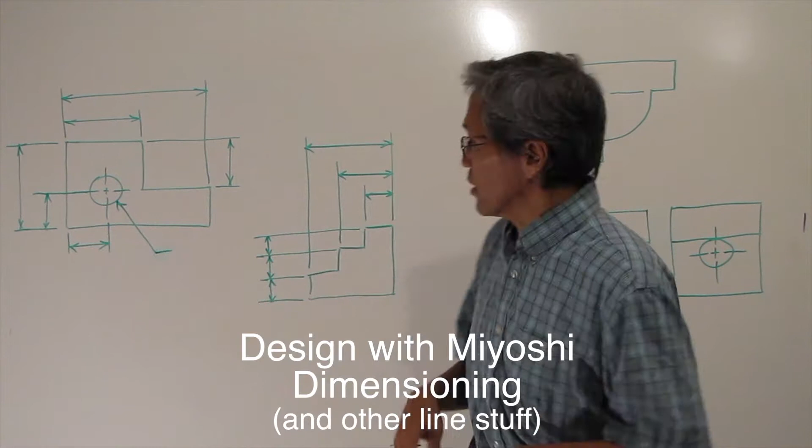I want to talk a little bit about dimensioning today and a little bit about lines in general. So, let's talk about dimensioning. There are a few rules in dimensioning, and I just named one of them. The biggest one is that you never, ever cross dimension lines. Unless you're an architect and you're doing interior dimensions. And there's a few other reasons, because of course we know that every rule has an exception. Except of course that one, but that's a different story.

So, if you recall, object lines describe the object. Center lines tell where centers of arcs and circles are. I don't have any hidden lines over here, but hidden lines tell where things are hidden, something that you can't see in the particular view. Then we have extension lines, which extend from the object to the dimension line, and of course we have dimension lines, which are the ones with the arrows on them.

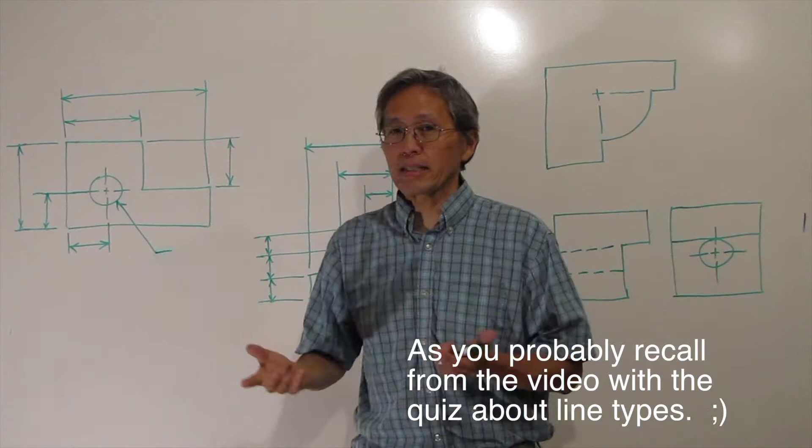So, like I said, the first thing you want to make sure you know is that you never ever cross dimension lines. So if I have this object right here, I would not want to have this dimension up here instead, because that would break that never rule. So we would not want to do that. And I'll just kind of erase that there.

So first thing, don't cross dimension lines. You can cross extension lines. Notice we cross extension lines there. You can cross object lines even. Notice we cross one there. And of course, you can cross center lines. We don't really cross any center lines there, but you can cross center lines and hidden lines as well. Okay? So, make sure you do that.

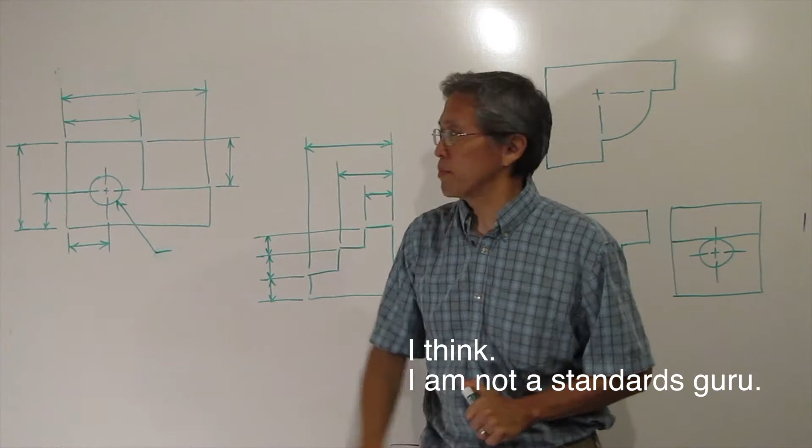The second thing you should know about dimensions is as you put them on a page, the ANSI, the American National Standards Institute, says that, at least they used to say this, the distance from the object line to your first dimension should be 3/8 of an inch. 3/8 of an inch minimum. It could be bigger than that, but it can't be smaller than that.

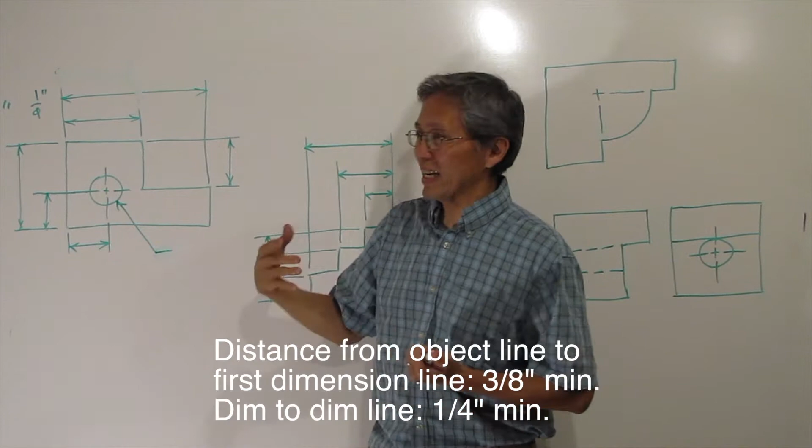Then each dimension beyond that should be 1/4 of an inch for every dimension you have beyond that. Okay? That's on the printed page. Obviously it would be different on the model, but that's what it is on the printed page. So 3/8 of an inch from the object line to the first dimension, and then 1/4 of an inch every dimension after that. So that's a nice way to look at things. It makes it nice and beautiful.

You will see some drawings that don't look like that exactly. They might be architectural drawings or some other kind of drawings that don't have those exact dimensions, but those are what I like to do for my mechanical drawings for my students.

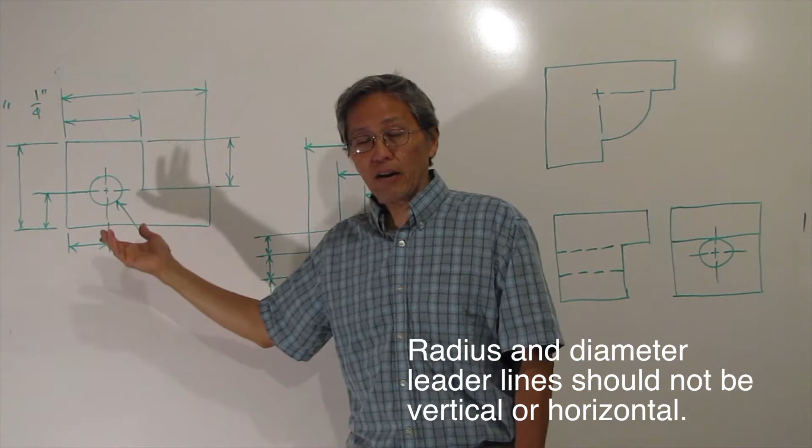Another thing you notice here is that this diameter dimension, this leader line, is not vertical or horizontal. You want to stay away from vertical and horizontal as best you can. You might need one vertical or horizontal if you're doing some other thing besides telling your radius or diameter. But for radius or diameter, a leader line should not be vertical or horizontal. So it shouldn't come down like a center line either way. Okay? So there's a few things about line types and about dimensioning.

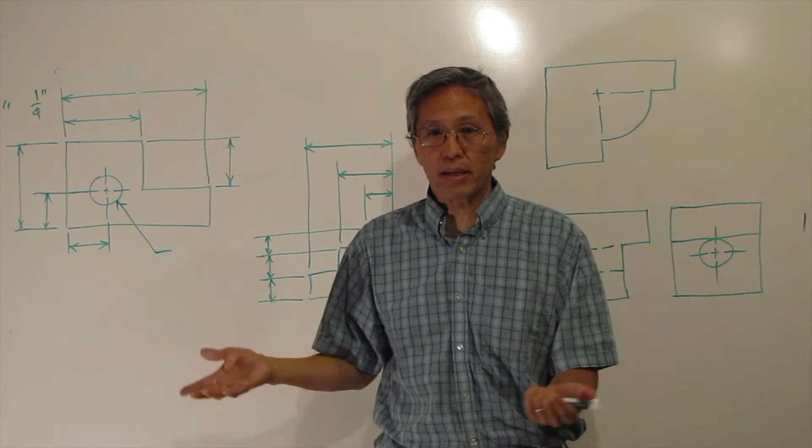Now, dimensioning tells you how big something is. If you're using a CAD software package, then most likely you're going to get these gaps determined by the software package. Not by you, but by the software package.

And one of the things I actually did on purpose was, notice there's a gap here on the center line. There's not a gap here between the center line and the dimension line, but there is a gap here between the center line and the extension line. The reason I did that is because some software packages, if you grab the end point of a center line, will put it right on the end there.

If I'm using SolidWorks, for instance, and I grab this center line and this line down here to dimension that, it should put a gap, just like it does here. Other software packages, you may not see that.

The other thing is, you should be able to change it, but there's a little line. The line extends beyond the dimension line here. And there's other different style things you can do, but that's determined by the software package you're using and how much you modify the parameters for that. Okay? That's some of the fundamentals of dimensioning.

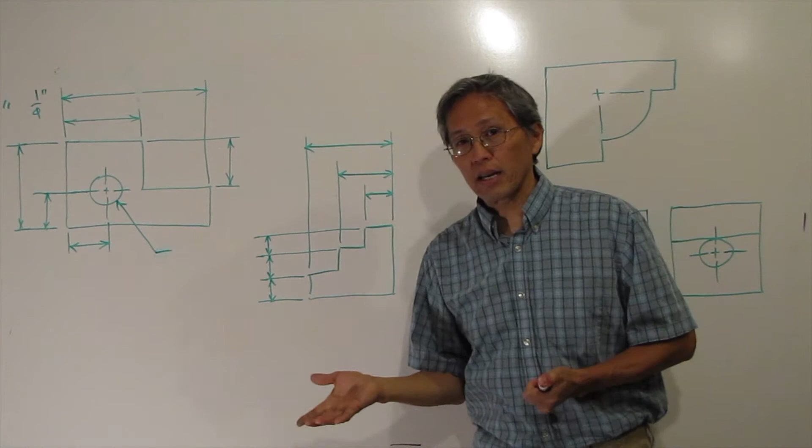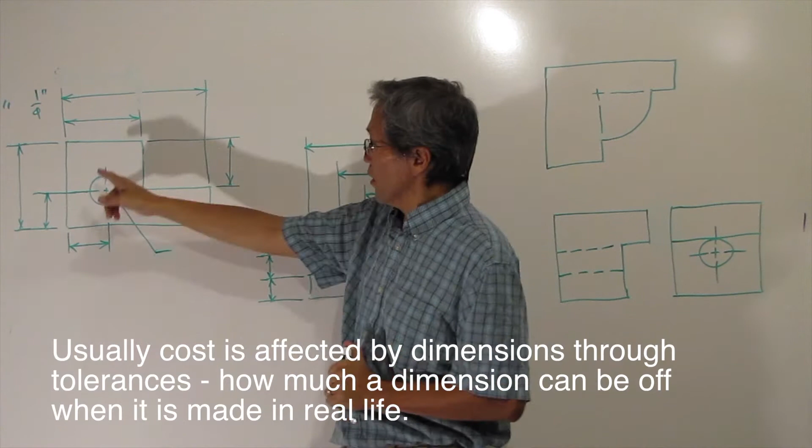Now, here's a couple different types of dimensioning. And dimensioning, believe it or not, can change the cost of an object. So over here, there's a couple things you can see on this drawing that are important. Actually I have one too many dimensions over here. Oh no, I don't. This one's for that guy here. I actually have this dimension here for the gap there.

This tells you that this distance is more important than this distance. The overall length and this distance here are more important than this guy here. Same thing with this one. The overall height and the notch out here are more important than this little height right there. And you can tell that by the dimensioning. The dimensioning tells you what's important.

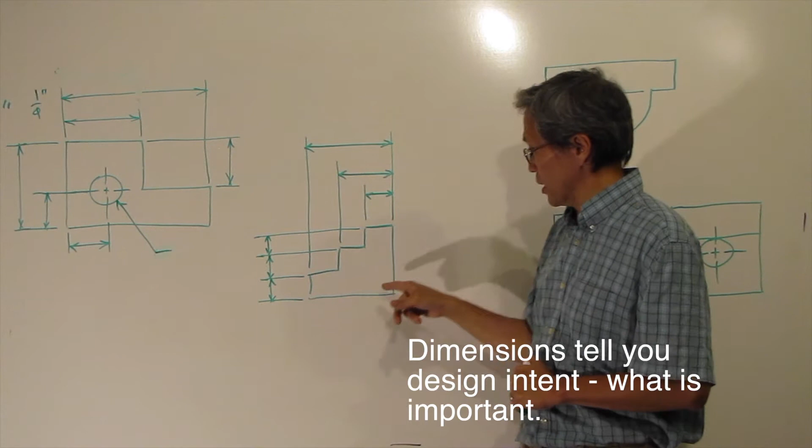Over here, the same kind of thing applies. This is what's called datum dimensioning, when everything is measured from the same point. So I'm measuring everything from this line here over to the first step, and then over to the step there, and over to the step there. That tells me that the distance from here to there, and from here to there, and from here to there are more important than the step treads in this case.

And the same thing, the important thing on the vertical side is that these heights match up, whatever those heights are, whether they are equal to each other or not. But these heights are more important than the distance from the bottom to the top, for instance. So the dimensioning will tell you what's important. So there's a few things about dimensioning.

Now I wanted to mention one other thing about lines. It's kind of a lost art anymore with CAD packages, because one of the things that you would do as a manual drafter would be that you would know when to make a line go into another line and when you would want to make a gap. So over here, this is a drawing that I have my students do, and in this drawing, I need to locate where the center of this circle is, or that arc.

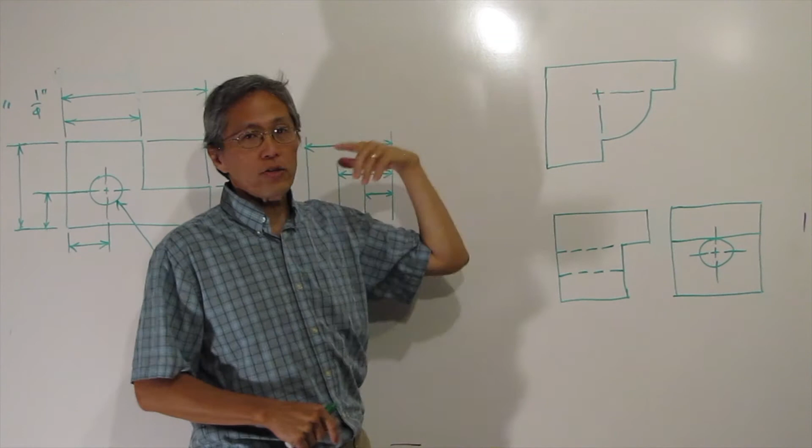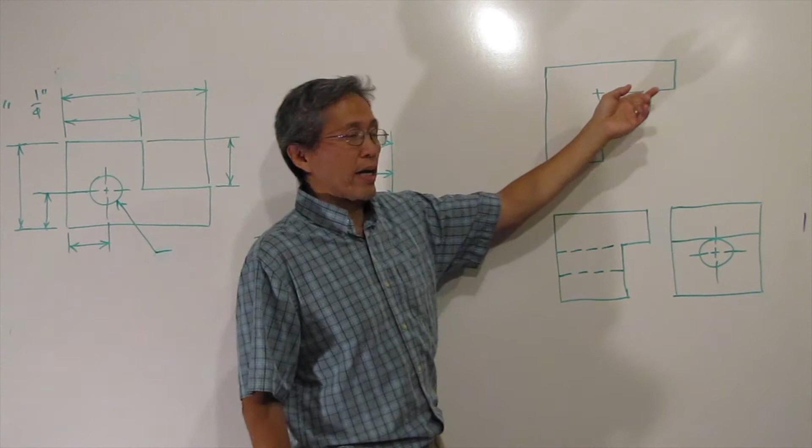And the easiest way to do that is to extend this object line. I make a center line horizontally, and I make a center line vertically. When these are collinear, in other words, they are the same line, if this object line and that center line are the same, I'll make a little gap there. If this object line and this center line are collinear like they are here, I'll make a gap there. Because you don't want the reader of the drawing to have to determine whether that line, if it was solid all the way through, was part of the object line or part of the center line.

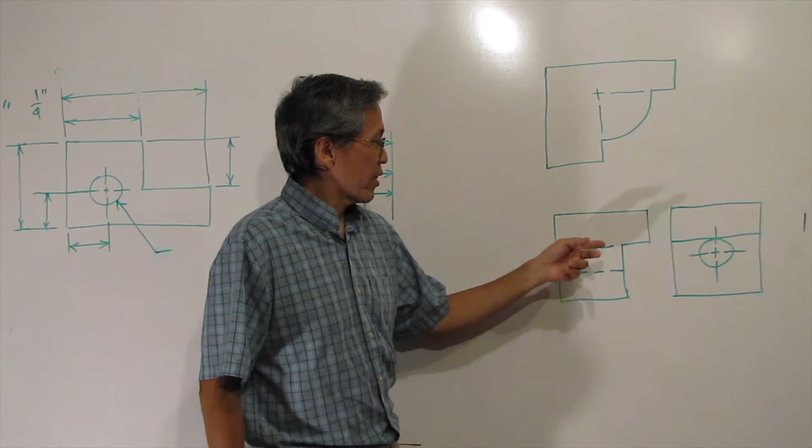Here's a different illustration. You can see the two different views. This is the same kind of thing, but this one uses hidden lines instead of center lines. Here's the top view, and here's the side view where I'm looking at this hole that goes all the way through. Since this is tangent to this edge there, I know that this object line and this hidden line for the hole are collinear. So if they're collinear, I make a gap there.

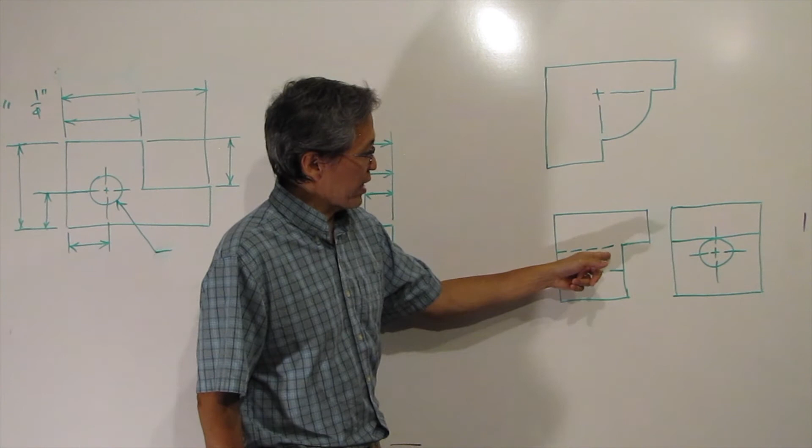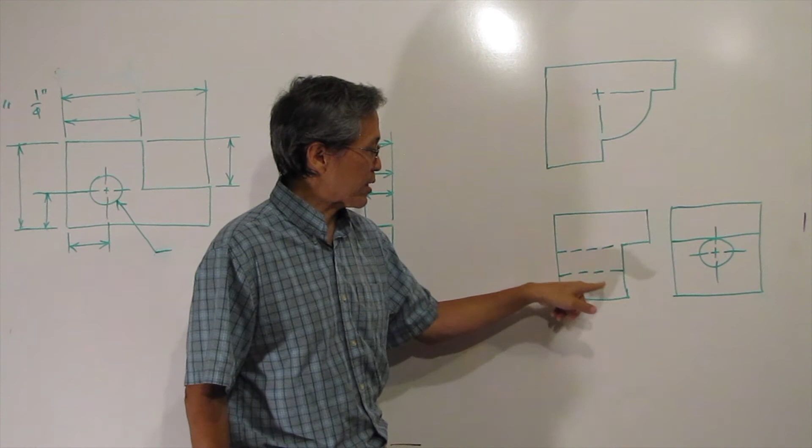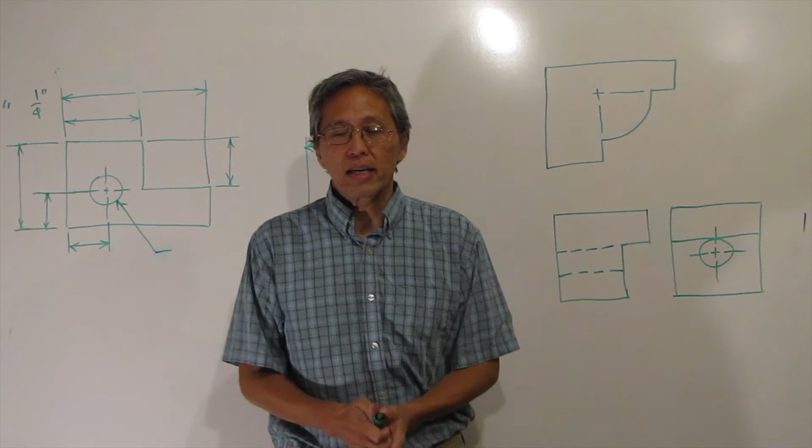Then the other side of that coin is, if the hidden line and the object line are perpendicular, the way you show that it goes all the way through is make sure that it touches the object line. Same thing on this side. It touches the object line, so we know that hole goes all the way through. So, just a few things: some dimensioning rules, some rules about lines, especially center lines and hidden lines and how they interact with other object lines.